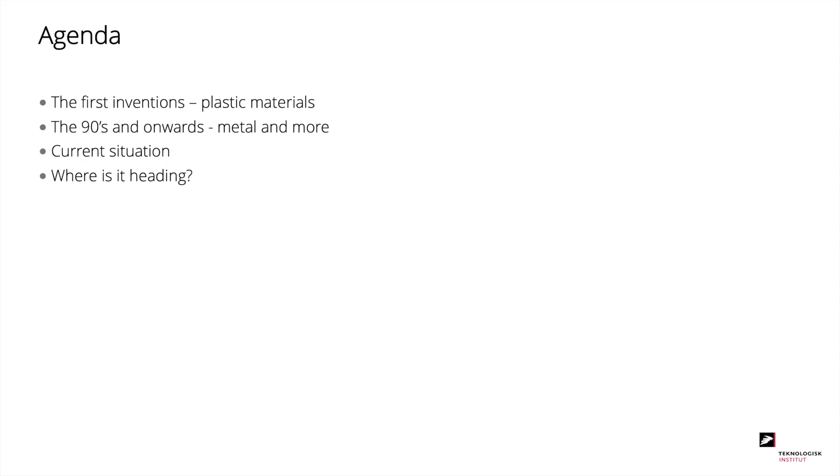Hi, my name is Henning. In this first video, I will go through the history of 3D print. The agenda is that we first look at the first inventions, the plastic printers. Then we look at the 90s and onwards, where metal printers were introduced along with other technologies. Then we look at the current situation, and finally where it's all heading.

We start by looking at the first inventions. It started back in 1980 in Japan, where Dr. Hideo Kodama filed a patent on photopolymer curing using UV light. However, that invention was never commercialized.

Then, a few years later in the US, Charles Hull filed a patent for stereolithography. In 1986 he started the company 3D Systems, which is still on the market, one of the big players. And in 1988, the first commercial rapid prototyping printer, SLA1, came on the market.

The next technology invented was powder bed fusion of plastic. In 1986, Carl Deckard from the University of Texas filed a patent on the SLS technology. This was commercialized in 1992, when DTM launched a beta machine. And in 1989, the European company EOS was founded, and it's still one of the big players on the market.

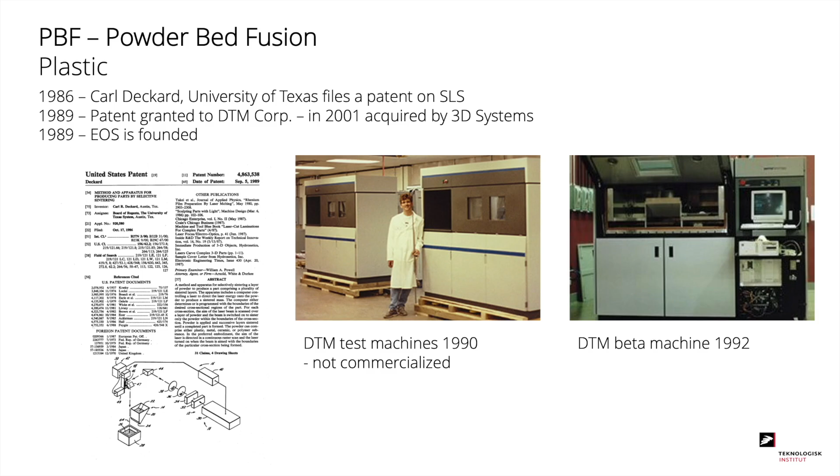The third well-known technology is FDM, fused deposition modeling, the extrusion technology, where we also today find all the cheap printers. In 1989, Scott Crump filed a patent for FDM, and Stratasys was founded, still one of the big players on the market today. The first commercial machine was shipped back in 1992.

When the patent expired in 2009, after living for 20 years, we saw an explosive growth of FDM machines, and prices dropped from around $10,000 per machine to under $1,000 per machine.

In the 90s, a lot of things happened. Only a few machines were installed, and there was limited commercial success on machine sales. However, there were a lot of R&D activities, and several new technologies were invented. The situation was that there were 3 times more patents filed than machines installed, which led to a huge number of patent fights where companies tried to defend their rights.

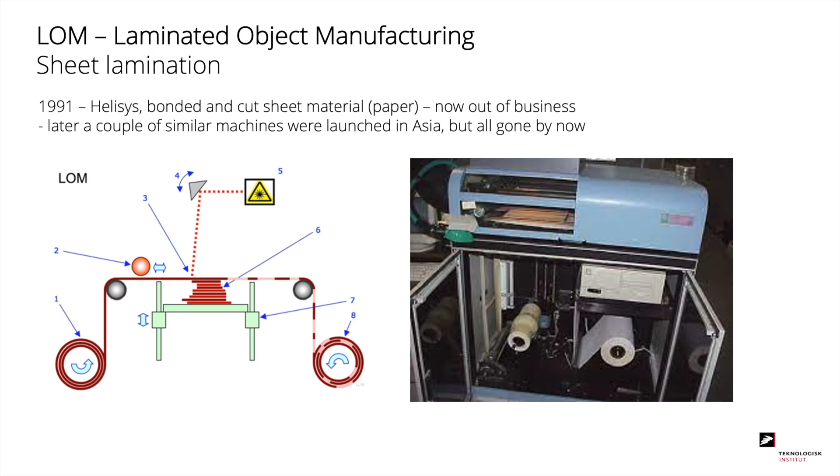Binder jetting is a successful technology also today, where you glue powder together of different materials, and for metal you subsequently have to sinter the parts. In 1996, Z Corp made a gypsum powder printer where the powder was glued together using MIT's inkjet technology. In 1999, Extrude Hone, now ExOne, made the first metal binder jetting machine. And finally in 2016, Hewlett Packard introduced the multi-jet fusion machine for plastic powder.

One of the metal technologies invented in the 90s was DED, directed energy deposition, where you place powder and at the same time melt it using an energy source. The first machine with this principle was launched in 1997 by the company Aeromet, which produced the world's first laser additive manufacturing machine for titanium powder.

In 2014, Sciaky made a machine that melted the powder using an electron beam. Also in the 2010s, several systems called wire arc additive manufacturing were built. In principle, they are just welding machines where the welding head is moved around by a robotic arm, and by doing that they print parts in 3D.

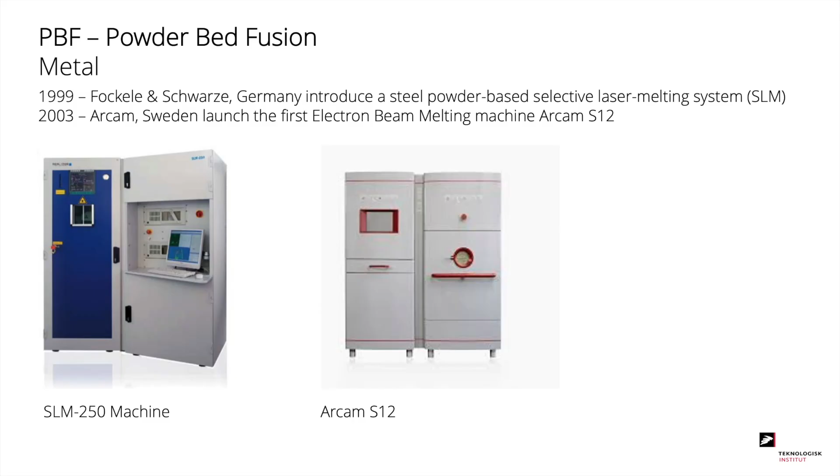Powder bed fusion is the most widespread metal print method today. The first system based on this principle was launched in 1999, where Fockele & Schwarze in Germany introduced a steel powder machine that used a laser to melt the powder. It's also called SLM, a name still on the market today. In 2003, Arcam in Sweden launched their first machine where the powder is melted by an electron beam. Material jetting is basically an inkjet printer where, instead of ink, you print with materials.

So you can print multicolor and you can mix different photopolymer materials. The first machine of this kind saw the light on the market in 2001 and was launched by Objet Geometries in Israel, now taken over by Stratasys.

And again, vat photopolymerization, the technology where it all started, a couple of new curing technologies have come up later. In 2002, EnvisionTEC came up with their first machine, the Perfactory resin printer. They use the DLP mirror chip known from projectors to cure the resin.

And in 2015, Carbon 3D came with their principle called the CLIP technology, where they cure the resin with an LED matrix, curing a full area or frame at the same time.

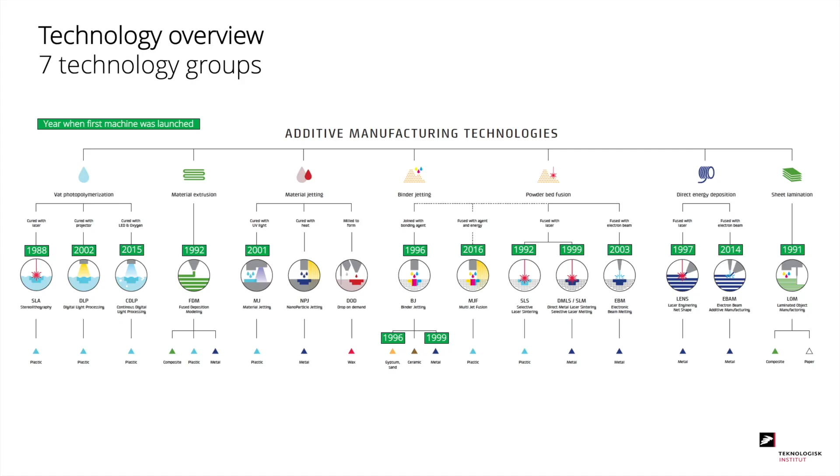Where are we today? Well, first of all, here you see an overview of all the technologies we have just been through. They are classified into 7 different groups, and in green is indicated the year when the first machine of each technology was launched.

Finally, we will see where it is all heading. Regarding machine sales, globally we see an exponential growth, both for industrial systems, defined as those with a price tag above $5,000, and for desktop and hobby printers with a price tag below $5,000.

Regarding materials, we see that on a continuous basis materials are being developed for almost each technology. We also see that material prices decline because of increased competition, as more vendors come up, also vendors independent of the technology suppliers. In 2020, still almost 80% of all materials were plastic materials, almost 20% were metal materials, and the remaining part, for instance ceramics, was around 2%.

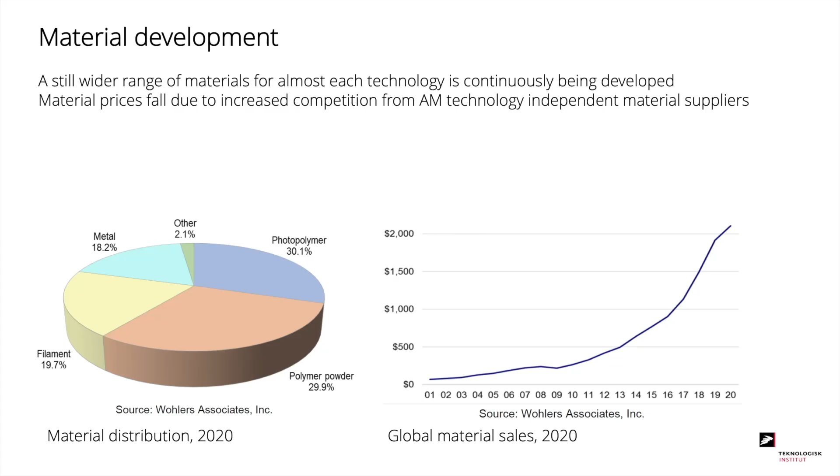For all materials, we also see an exponential growth, as for the machines. That's shown on the curve to the right.

Overall, we see for additive manufacturing a clear trend from prototyping towards real manufacturing and series production. That means we still produce prototypes, but more and more we produce tools, molds, fixtures, robot grippers, and end-use parts, with a tendency towards series production rather than individual parts.

Also, we see a clear consolidation trend in the additive manufacturing industry, where companies are merged or taken over, going towards fewer but bigger companies.

In 2020, globally, around 1 per mil of all production was additively manufactured. Some people find that this may grow to 5% in the future, so there's still a huge growth potential.

Hi, my name is Christopher, and in this module you will get an introduction to the 7 main AM technologies.

Let's have a look at the agenda for this module. First, we will look at an overview of the most common additive manufacturing technologies. We'll go through a 4-slide introduction for each basic technology, covering the technology itself, the materials, the pros and cons of the technology, and the leading machine manufacturers. Then finally, we will have a look at the technology maturity and industrial landscape.

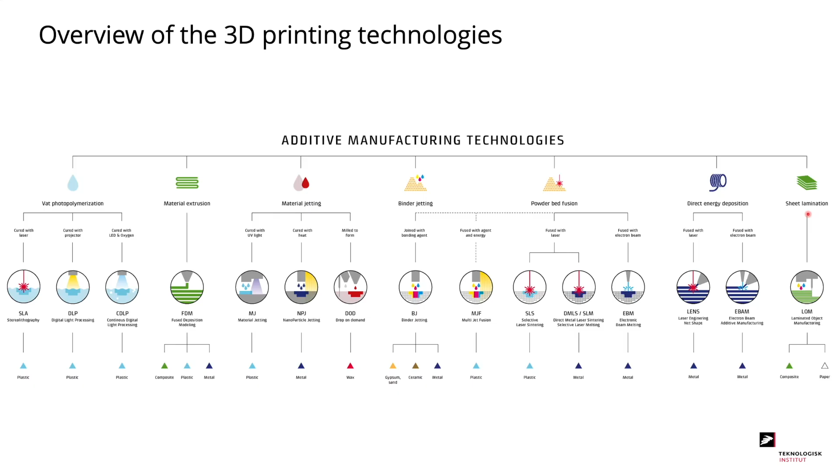First, we have the VAT technology. The VAT technology originated with the SLA process, also known as stereolithography. The process works by having a UV light curable resin in a bath. A laser source is applied to the resin and cures it locally. This is done layer by layer, as we can see here in the following video.

We first fill up our resin, and we then apply our laser layer by layer, slowly building up our part one section at a time.

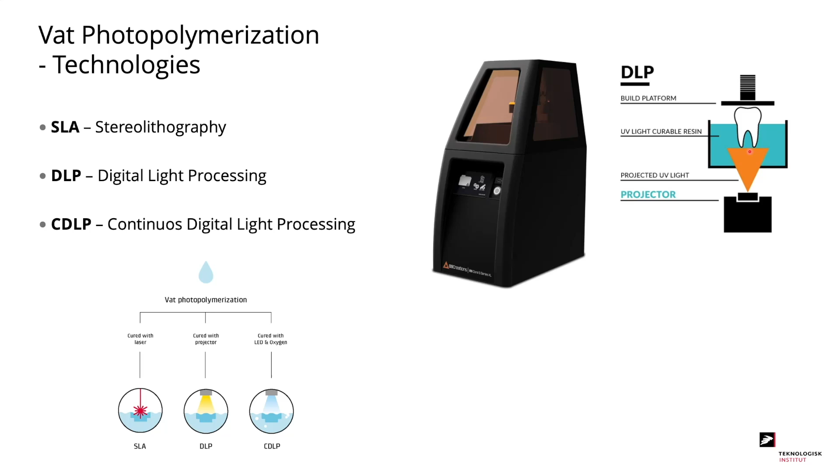The DLP process, or digital light processing, is very similar. However, we are using a projected UV light instead of a laser. This means we can process an entire layer at a time, and the process is typically faster. CDLP, or continuous digital light processing, is similar to DLP. However, the process platform is continuously moving, and we build our part as we go.

The VAT technology utilizes a range of materials. You can print everything from elastomers to transparent material, and also for dental applications.

Here we have an overview of the pros and cons of the VAT process. The pros include: it is good for prototyping, it is quick to print, and you can obtain a surface finish all the way down to 10 microns.

Some of the cons include the parts being brittle, and since they're reacting to UV light, they will react to sunlight, which leads to a loss of mechanical properties. There is also extensive post-processing required.

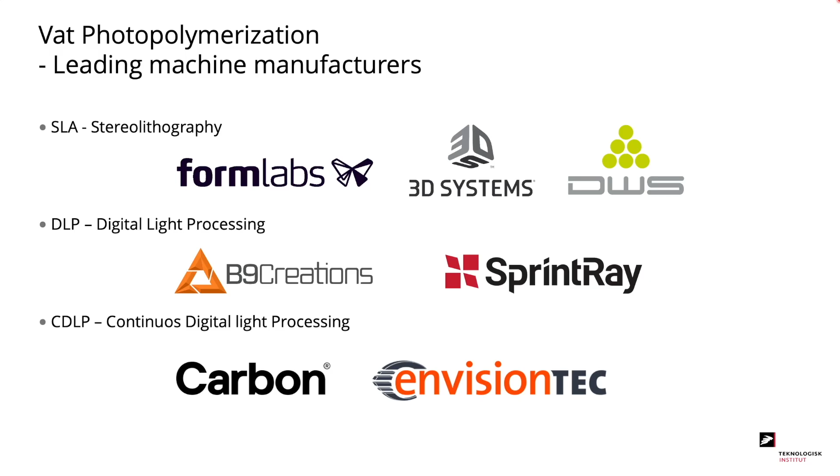Let's have a look at the leading machine manufacturers for the VAT process. For SLA, we have Formlabs, 3D Systems, and DWS. For DLP, we have B9 Creations and SprintRay, and for CDLP, we have Carbon and EnvisionTEC.

Now we will move on to the material extrusion process. This technology is most well known with the FDM method, or fused deposition modeling. The way it works is that you have a polymer material on a material spool. The material is extruded through a heated nozzle and deposited on top of your build platform. Layer by layer, you will be building your object. There are typically 4 configurations.

The first and most well known is the Cartesian 3D printer. As we can see here on the short video, we have a build platform that can elevate in the Z direction, and we have a nozzle that can move in the X and Y direction. We can then slowly build up our part like this.

Then we have the Polar 3D printer. Here the platform moves while the nozzle is steady. The third configuration is the Delta 3D printer. Here the nozzle is controlled using 3 linear actuators, and the material is deposited on a steady platform.

The final configuration is the Robot Arm 3D printer. Here you simply use a robot arm to control the deposition of the material as it is being extruded through the nozzle. Let's have a look at the materials used for material extrusion.

We have divided it into commodity materials and engineering materials. The main commodity materials include PLA, which is easy to post-process and has good heat resistance. Then we have ABS, known for great stiffness, durability, and a variety of colors. For the engineering materials, we have Onyx FRA.

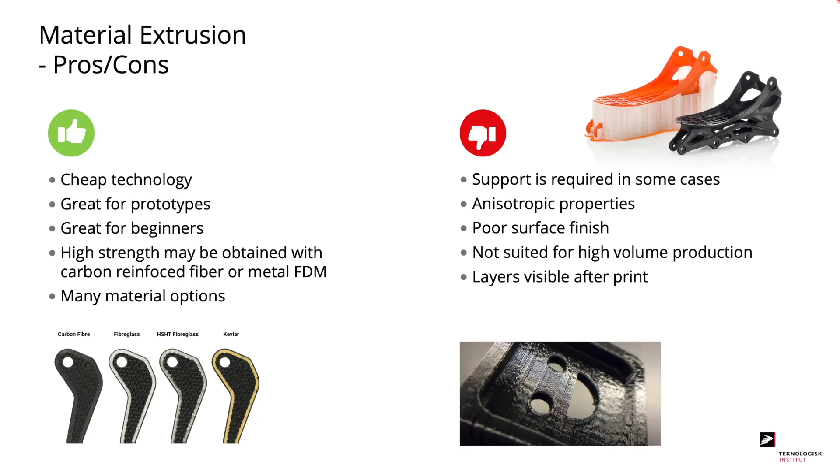Some of the cons include support being required in some cases. The properties are anisotropic, and you will obtain a poor surface finish. The leading machine manufacturers within material extrusion include Stratasys, Ultimaker, Markforged, and MakerBot.

Let's have a look at the material jetting technology. It can be divided into 3 sub-technologies. First being MJ, or material jetting itself. This is the main industrial technology.

Then we have NPJ, or nanoparticle jetting. This uses particle-infused liquid and heat to evaporate the liquid. Then we have DOD, which is drop on demand. It uses 2 print jets, one for building material and one for support material.

The technology works similarly for all 3 cases, and we here have a video demonstrating how the material jetting technology works by depositing material and using a UV light to cure the material as we go.

Let's have a look at the available materials. Here we have a view of the PolyJet materials, which is Stratasys' version of the material jetting technology. We can see a wide range of polymer materials, all the way from 2003, where they developed a rigid material called RGD 720.

Through the years, they have developed different kinds of materials. In 2011, they developed a clear material called VeroClear. We can see that after 2016, they developed a full color realism material.

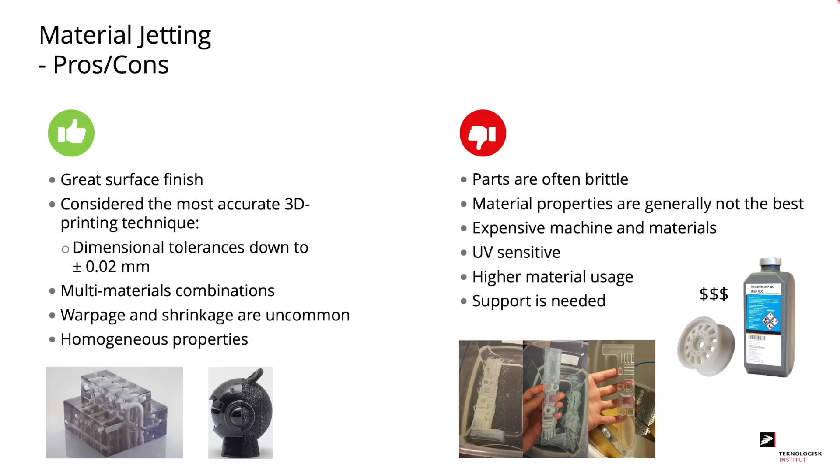Some of the cons include that the parts are often brittle, and the material properties are generally not the best. Both the machine and materials are quite expensive. The leading machine manufacturers for material jetting include Stratasys and 3D Systems for material jetting, XJet for nanoparticle jetting, and SolidScape for drop-on-demand. Now we will move on and have a look at binder jetting.

If we look at the binder jetting technology, we can see that it is subdivided into 2 technologies: one being BJ, or binder jetting, and the other being MJF, or multi-jet fusion. If we look at the process for the binder jetting technology, we can see how we are applying a binder to our powder.

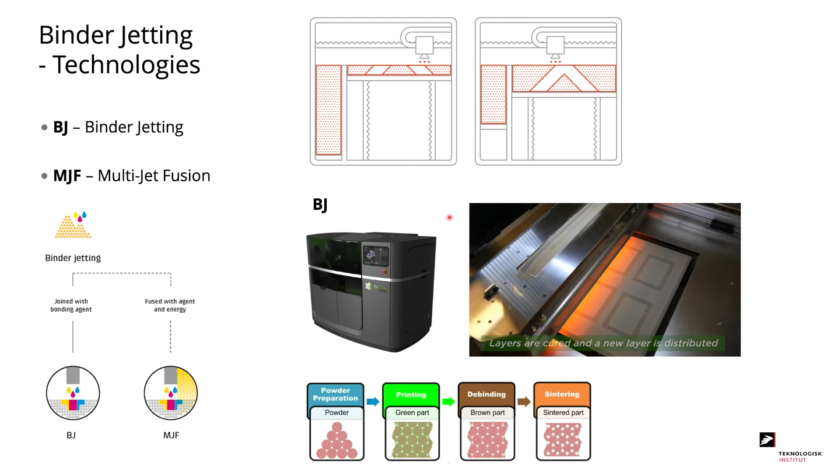After applying the binder, we heat it up to cure it together with the powder particles. After being cured, we have what we call a green part. The green part then needs to go through a debinding process where we obtain our brown part. It is very brittle in both of these conditions. Finally, we move our brown part into a sintering process where we sinter together our powder particles, obtaining our final geometry.

The multi-jet fusion process is very similar to the binder jetting process. However, we are using polymer instead of metals. Here we are in one continuous motion, both applying the fusion agent and heat to fuse together the part.

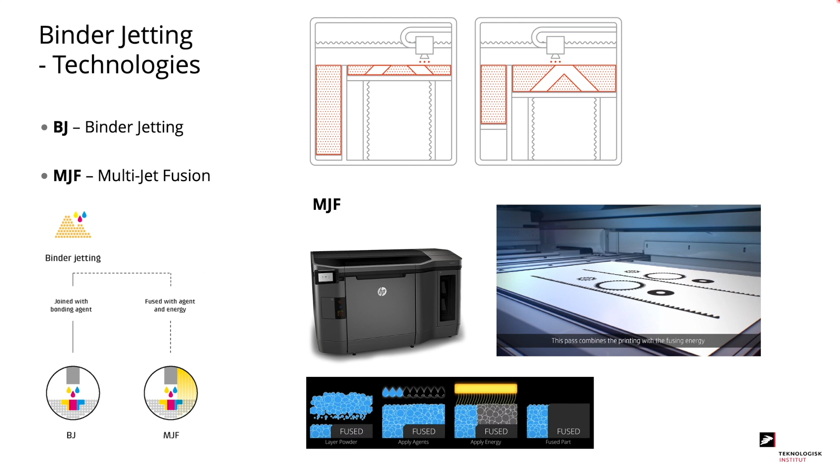If we look at the available materials for the binder jetting technology, we can see that for binder jetting itself, we have a wide range of alloy metals. We can also use ceramics, and we can even use ceramic metal composites. For multi-jet fusion, it is a wide range of polymers that are available.

Let's look at the pros and cons of the binder jetting process. We have fast production of parts, we can obtain high layer resolution, and the as-built surface finish is all the way down to 6 micron.

Some of the cons include, specifically for binder jetting, that the parts are fragile in both green and brown state. The debinding process is highly labor intensive, and the parts will shrink in a non-uniform manner, all the way up to 27%.

The leading machine manufacturers within binder jetting are ExOne and Digital Metal for metal binder jetting. For ceramic binder jetting, it is 3D Systems and VoxelJet, and for multi-jet fusion, we have HP.

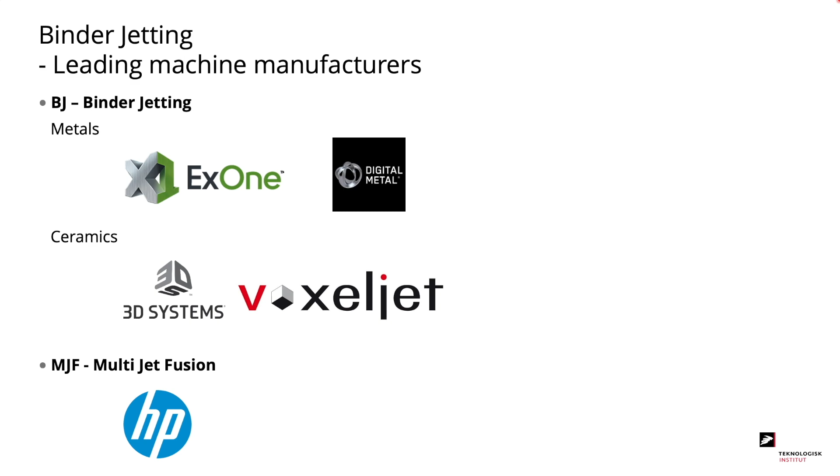Now we will move on to powder bed fusion. The powder bed fusion technology can be subdivided into 3 main categories: SLS, known as selective laser sintering; SLM, known as selective laser melting; and EBM, known as electron beam melting. The principle behind all 3 subcategories is the same. We are either applying a laser or electron beam to a powder bed of powder.

Let's look at the available materials for the powder bed fusion process. For SLS, we are working with polymers, and we can use everything from PA12 to PA with fillings such as carbon, glass, or metals. For SLM, we work with metals.

Here we can use everything from stainless steel to Inconel, aluminum alloys, and even precious metals. The EBM process is very similar, and we can also use stainless steels, titanium alloys, and even alloys such as cobalt chrome. The pros and cons for the powder bed fusion process includes that you can create complex geometries.

It is ideal for functional parts. For the SLS technology, you will not require any support. And the SLM and EBM technology both provide great mechanical properties.

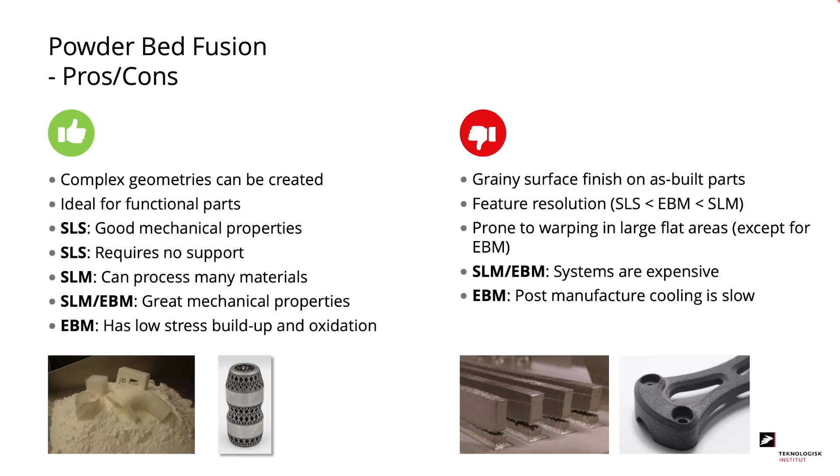Some of the cons include that you will have a grainy surface finish on as-built parts. The feature resolution is not the best, however SLM is better than EBM, which is better than SLS. It is also prone to warping in large flat areas, except for EBM, because it is processed at a very high temperature. For both SLM and EBM systems, there is a big con that they are very expensive.

The leading machine manufacturers within powder bed fusion are, for SLS, EOS and 3D Systems. For SLM, we have EOS, Concept Laser, Renishaw, Trumpf, DMG Mori, Prima Additive, and SLM Solutions. For EBM, we have Arcam EBM and JEOL.

We will now move on to directed energy deposition. Directed energy deposition can be subdivided into three main categories: first being LENS, known as Laser Engineering Net Shape; then EBAM, known as Electron Beam Additive Manufacturing; and then we also have WAAM, Wire Arc Additive Manufacturing.

The basis of the technology is that you're using either a laser beam or electron beam to melt powder or wire as it is being deposited on a substrate. The wire arc additive manufacturing process is very similar, however here you are applying a current to your deposition nozzle and substrate, which creates an electric arc between the two, which can melt the material as it is being extruded.

If we look at the process of the technologies themselves, we can here see how the LENS process works.

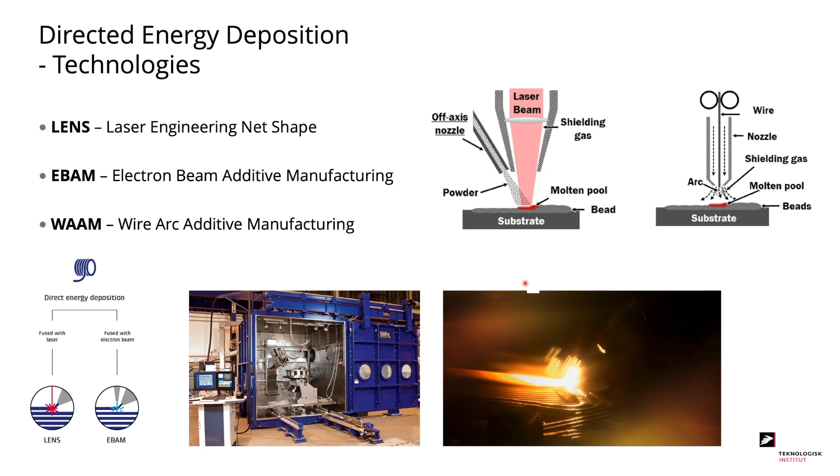We are applying our powder together with a laser, allowing us to build up our part. The EBAM process works similarly, however here we are using a wire to deposit, and we have an electron gun out of view in this video. Finally, we have the WAAM process, which uses wire arc melting to deposit a wire as it is being extruded, and we can see how we can quickly build up a bathtub-like structure.

The available materials for directed energy deposition include stainless steels, titanium alloys, Inconel, aluminum alloys, and even copper.

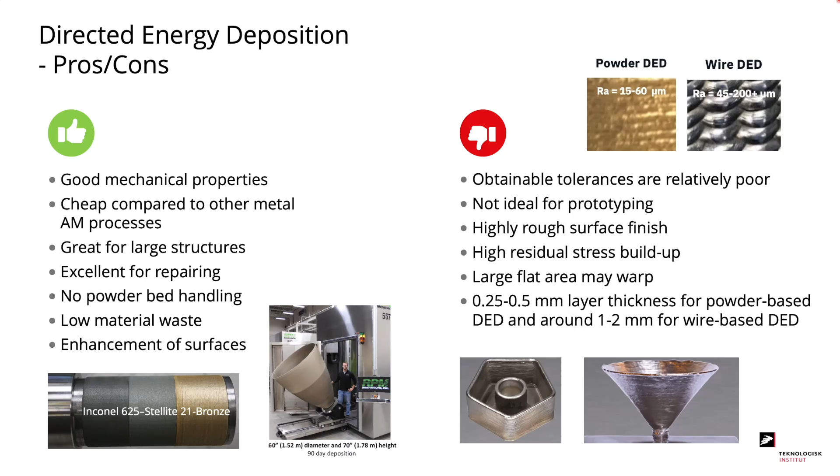If we look at the pros and cons of the directed energy deposition process, you will obtain good mechanical properties. It is cheap compared to other metal AM processes, and it is great for large structures as well as excellent for repairing. Some of the cons include the obtainable tolerances being relatively poor, it is not ideal for prototyping, and you will have a highly rough surface finish.

The leading machine manufacturers within directed energy deposition include, for the LENS technology, Optomec, Beam, and Prima Additive. For the EBAM technology it includes Sciaky, and for WAAM it is RAMLAB and MX3D.

Now we will look at the final of the 7 main technologies, namely sheet lamination. The specific technology is known as laminated object manufacturing, or LOM. It works by having a foil supply of either thin metal or paper. A heated roller is rolled across the foil, ensuring that it is bonded towards the lower part of the object you are building. Afterwards, a laser cuts up your piece to ensure that only the area of interest is left.

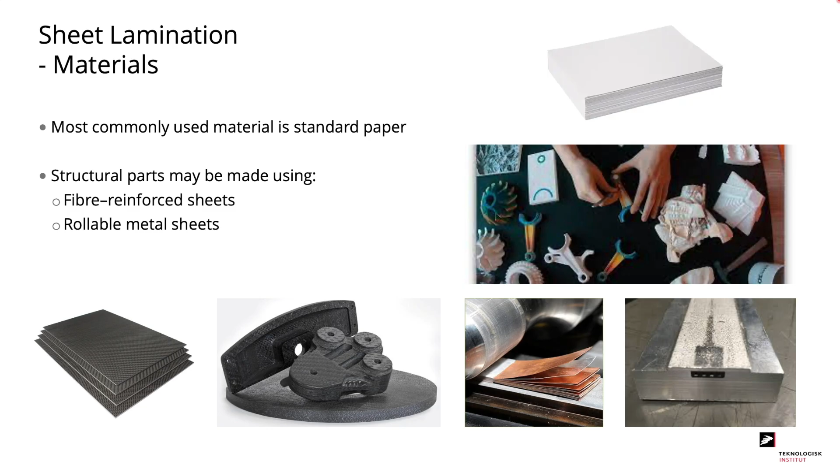The process is also possible to use for paper with color, and after having built up your paper part, there is some manual processing removing the layers that are not needed. The most commonly used material for sheet lamination is standard paper, but we can also produce structural parts by using fiber-reinforced sheets or rollable metal sheets.

Let's look at the pros and cons of the sheet lamination technology. The materials are cheap and the production costs are low, you can create large parts, and you don't need any support. However, some of the cons include that you cannot produce complex geometries, the printers are relatively expensive, and you will only obtain a poor surface quality.

The leading machine manufacturers for the sheet lamination technology are originally Helisys and Mcor. Helisys has since been succeeded by Cubic Technologies, and Mcor has been acquired by Clean Green 3D.

Now we will have a look at the technology maturity and industrial landscape of metal AM and polymer AM. Let's first look at the maturity of the AM polymer technologies. All of the technologies that we covered, including VAT, filament-based material extrusion, powder bed fusion, and material jetting, are all in the top right corner, meaning they are used for widespread industrial use.

If we look at the metal AM maturity index, we can see that the SLM technology has industrial widespread use. The LENS technology, EBM technology, and WAAM technology have industrial use. And finally, both EBAM and binder jetting are in the category of first applications.

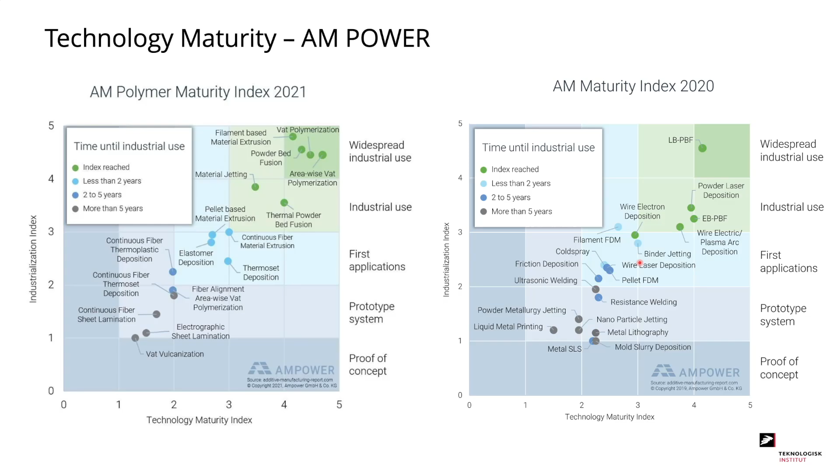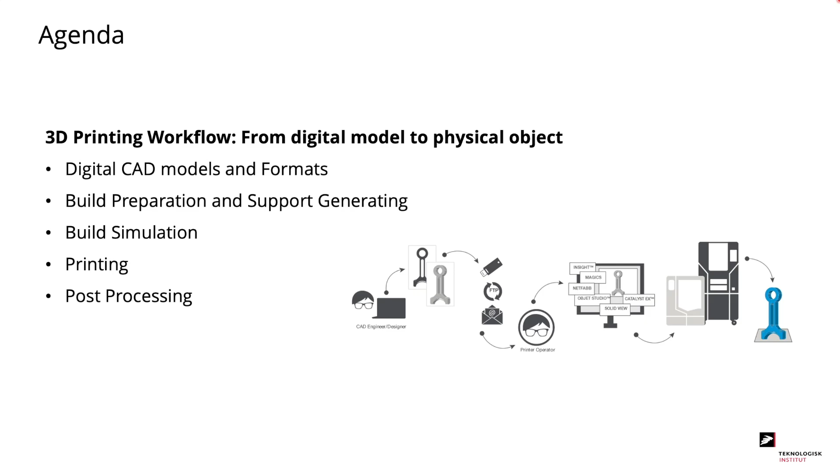First of all, we need a 3D model of the part that we would like to print. We will make that in some kind of CAD program. For industrial use, you will typically use programs such as SolidWorks or CATIA. These programs use parametric modeling, where it is easy to go back and make changes, but also easy to make new changes. Some of the common formats for these programs are either STEP or Parasolid X_T.

For non-industrial use, the STL format is common.

This is a dead format where it is more difficult to go back and make changes. The STL format uses triangles to represent the model, which makes it difficult to make rounded curves. In the future, the 3MF format could replace the STL format and solve some of these issues.

First, the CAD model is imported into the job preparation software. This could, for instance, be Materialise Magics. Next, we need to orient our part in the printer. This is typically a compromise between getting a high level of detail, but also printing as many parts as possible in each build. Finally, the support structure should be applied to the part, which ensures that the part is attached to the platform during printing.

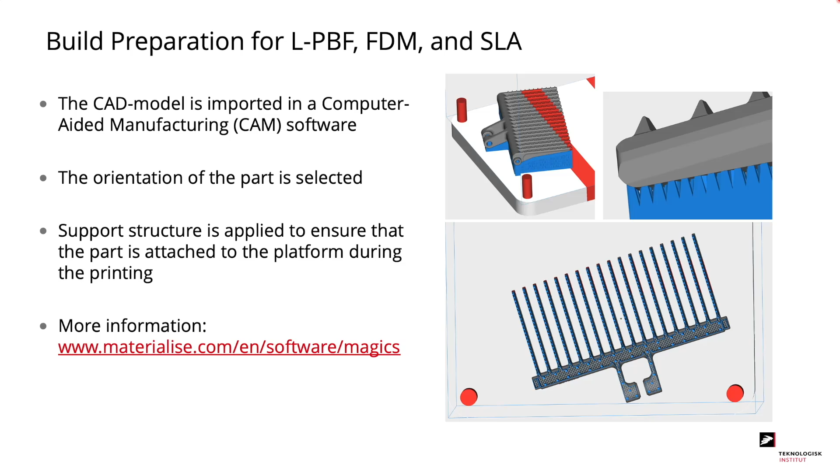Keep in mind that the support structure should also be easy to remove after printing. You can find more information about build preparation at the Materialise Magics website.

Next, we will look at build preparation for material jetting and SLS, which is slightly different. Here, parts can be nested in 3 dimensions within the build chamber, and support structure is not needed. When you don't need support structure, you have greater design freedom compared to other print technologies. Just be aware that you should be able to remove powder from channels and cavities after printing.

Before printing, you can simulate the whole printing process. You do this to predict and avoid failure during printing, and to estimate geometrical distortion, and you can even use it to compensate for the distortion. Build simulation is often used for laser powder bed fusion and metal binder jetting, but also in some cases for FDM and SLS. After printing, we need post-treatment.

Here are some examples of initial post-treatment. For FDM and SLA, you use a screwdriver and grippers to remove the support structure. For SLM and E-beam, the two metal technologies, you first need a furnace to remove residual stresses. Then you need an angle grinder or grippers to remove the support structure, which is more difficult to remove compared to FDM and SLA.

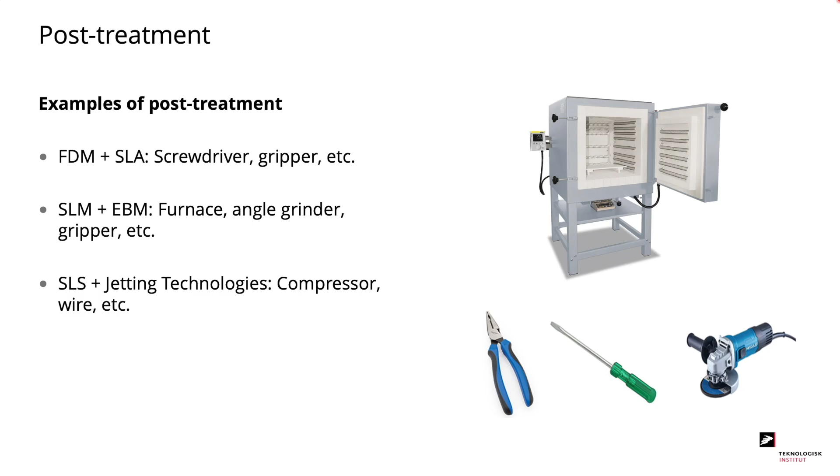For SLS and the jetting technologies, we don't have support, but the powder is more difficult to remove. Here we use a compressor to blow away loose powder, and we can also use piano wire to remove powder from internal channels.

Finally, we have surface finishing. For metal printing, we use more aggressive technologies. This could be abrasive blasting, where you typically use glass or corundum beads to even out the surface. It could also be deburring, where you use ceramic chips to grind the surface. For polymers, you can also use deburring. Furthermore, you can use chemical etching to seal and smoothen the surface. Finally, you can also color your parts. This is especially relevant for SLS parts.

Finally, we have a video showing the entire workflow. In this case, it's laser powder bed fusion in metals. First, we are preparing the build job by finding the perfect orientation and adding support structure on the part. Next, we are printing the part layer by layer.

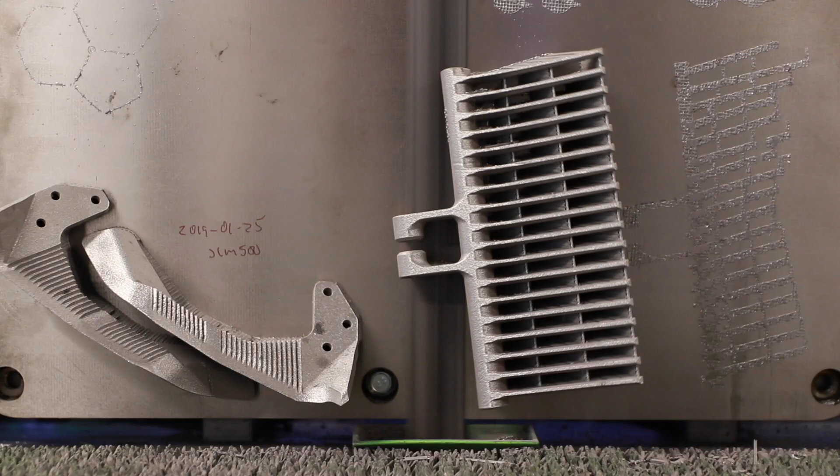After printing, we transfer the build cylinder to a powder removal station. Here we remove all the powder that is not used to print the part. After removing the powder, the parts need stress relief, which is typically done in a furnace. After stress relief, the parts are removed from the platform with a bandsaw, and the support structure is removed by hand. Finally, we have surface finishing, where we use abrasive blasting and deburring.

Hi, my name is Ronnie, and in this module we'll look at some design features that can add value to your 3D printed part. Let's start by looking at the agenda for this module.

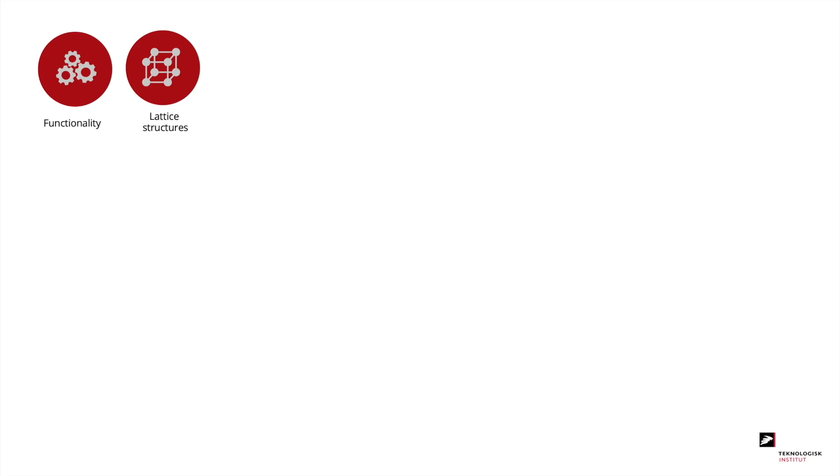If we start in the top left corner, we can see that we can use 3D printing to get some new functionality into our parts. We can also start to make some lattice structures that weren't possible before. We can start to optimize our components towards lightweight, thereby making them both lighter and stiffer. We can begin to make part consolidation, where we put more parts together in one.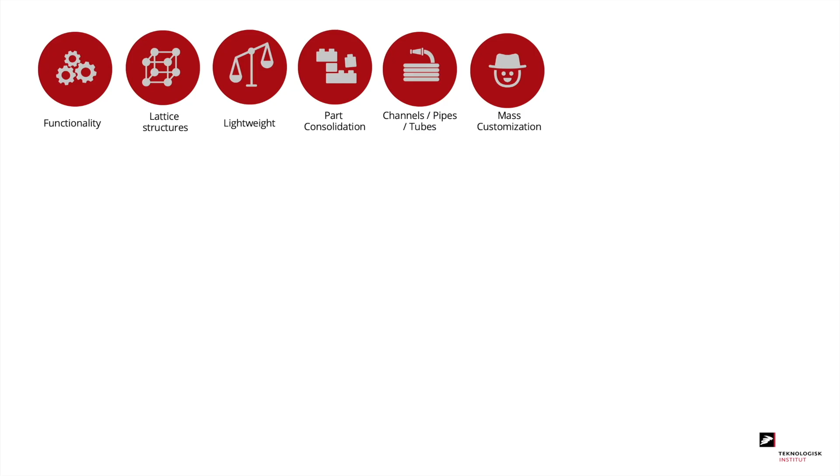We can make channels and tube connections that weren't possible before. We can also make mass customized products in large numbers without added expenses. And in addition, we have the possibility of making some components with thermal properties that weren't possible before.

The 3D printing technology also gives us a large extent of design freedom that we can utilize. And finally, the computer is one of the really strong tools when designing for 3D printing. So we'll also look at how we can use that.

If we start to the left and assume that we need to design a product, well, then we can take the balls from the top row and add them to the basket. Thereby we add some value to this product, which justifies the use of 3D printing. The more balls that we can start to put in this basket, the more value we can add to the product, and the more we can justify using 3D printing as a manufacturing technology.

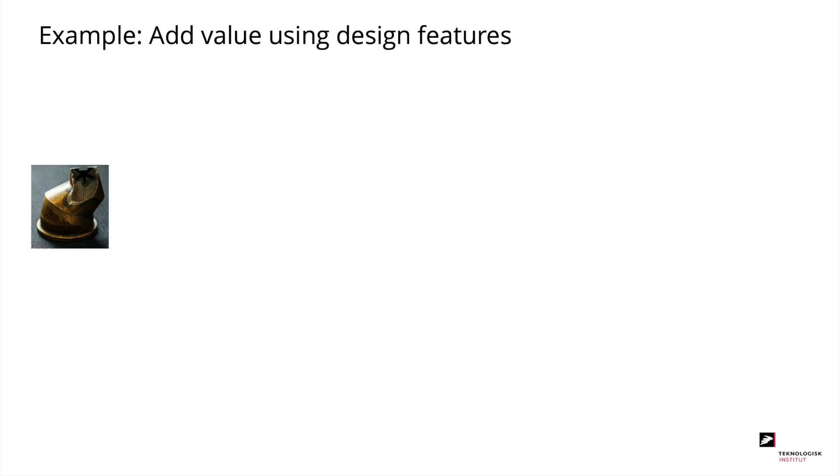Let's take an example to show how these baskets can be used to design a part. And remember, the more features that we can get into the basket, the better the product we get. So if we take a relatively simple part like this nozzle to make cookies, then it used to be made out of 6 parts, but with 3D printing we can make it in just 1 part. So here we have some part consolidation.

Furthermore, the flow through the nozzle is more smooth and even, and we can get that by utilizing some of the possibilities of making special channels. And finally, we can use mass customization, where depending on the cookie that you want, we can quickly change the design of the nozzle so we get a nozzle that fits the individual cookie that you want to make.

Now we've taken a brief look at why we should design for 3D printing and how we can utilize these features. Now we'll take a closer look at the 9 different features and see where they make sense by looking at some different cases where they've been used.

This is interesting because it saves a lot of assembly time, and we don't need to have as many spare parts in stock. Often we can also save some weight, and it reduces the amount of contact areas, which could be of interest to some industries.

Here's the first case to illustrate part consolidation, and this is the layout that I'll use for all the cases. So in the top right corner we can see the basket, and we can see the features that we added to the basket in this case.

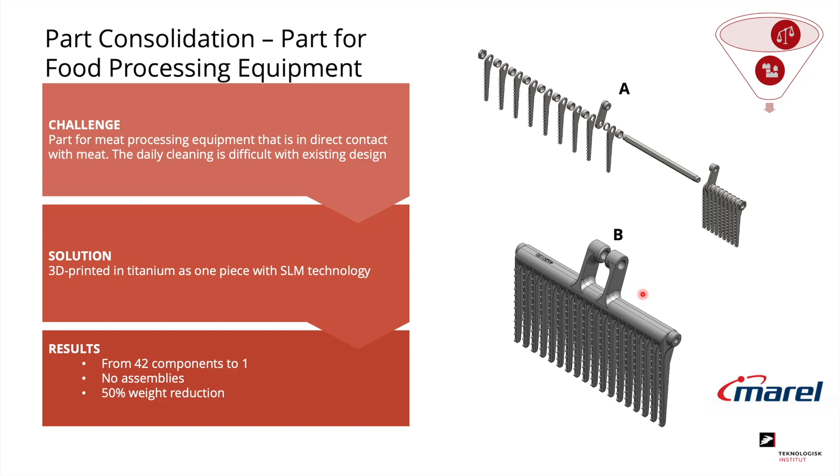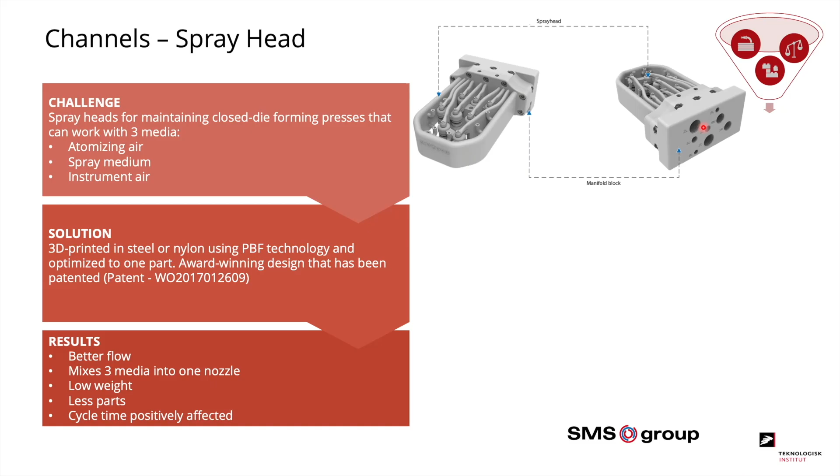If we look at how it was made previously, we can see in the picture to the left that it was a massive block consisting of a lot of different parts. That means that when we start to look at 3D printing, there's definitely a potential for reducing the weight. If we then compare it to the 3D printed version to the right, we can see that this is much smaller, so there's definitely a weight reduction.

We've also optimized the flow, and it's easier to get the lubricant where you want it because we can control the placement of the nozzles much better. By 3D printing this spray head, it's now possible to print it in metal, but we can also print it in nylon with the powder bed fusion technology, and it can withstand high temperatures. In fact, this is such a good idea that SMS Group has chosen to patent this solution because they see a great business opportunity.

Conformal cooling is all about getting these channels as close to the surface of the metal block as possible, because then we can cool our plastic part much faster when we cast it. In a minute you'll see a picture of what such an injection mold looks like.

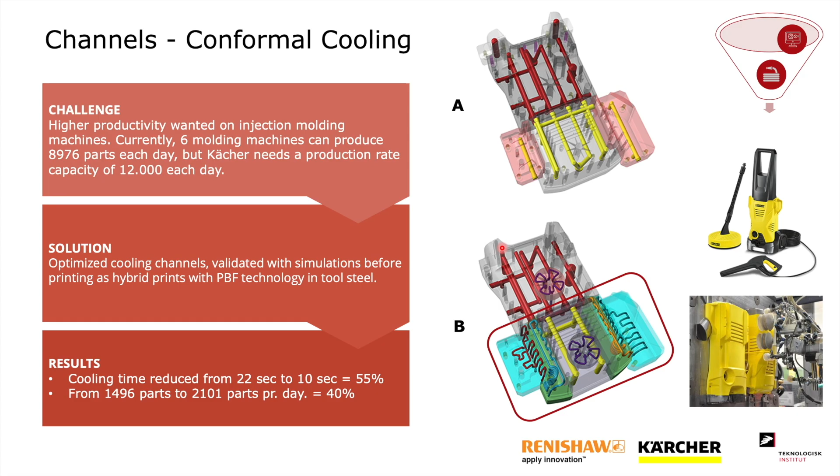Next up, we'll look at mass customization, where we can 3D print parts that perfectly fit the individual person. So what is mass customization? This is when we design products that perfectly fit their function, and as the function changes, we can also quickly change the products. This means we often get better solutions that are a much better fit.

This is really interesting when we look at parts that need to fit the human body. So if, for instance, you needed a custom-fit bike helmet, you would be able to 3D print it.

One of the industries that have really seen an impact from using 3D printing is the hearing aid industry. Towards the end of the 1990s, you went from modeling these hearing aids and making them by hand, to now 3D printing them. The way you make these hearing aids is that you take a wax cast of the person's ear.

Then you scan it and put it into the computer, and via a preparation program it goes to the 3D printer where it's printed, often on an SLA printer. Then you get the finalized print, you add the electronics, and the product is ready for the client. This means you've saved a lot of manual hours in the manufacturing process by 3D printing these hearing aids.

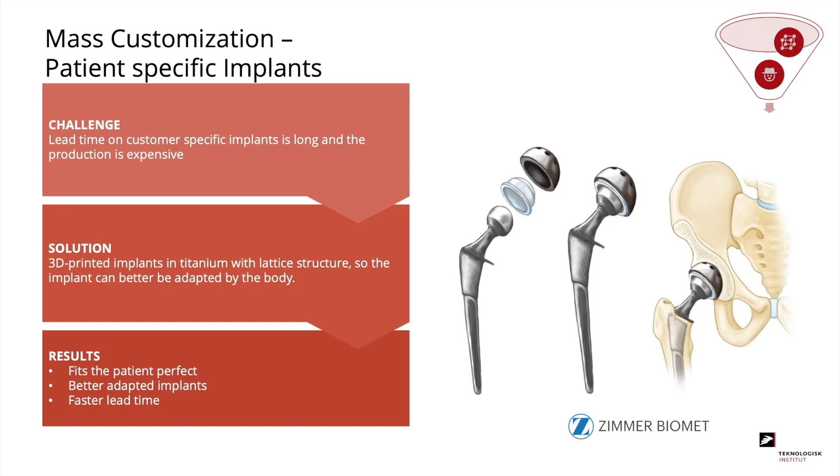So the hearing aid goes outside the body, but using metal 3D printing we can actually start to print parts that go inside the body as well. In this example, it's a hip socket that's being 3D printed. The hip socket consists of two 3D printed parts.

In this picture to the left we see the socket itself, and the surface is perforated and has a kind of lattice structure. It's because of this lattice structure that the tissue inside the body ties better to this type of prosthesis than if it was a blank surface. And it's because of this that there's a huge potential in 3D printing parts for humans using metal 3D printing.

With 3D printing, it's also possible to achieve new thermal properties with materials you weren't able to use before. So what is thermal when we're talking 3D printing? Well, it's a component's ability to absorb or give off heat.

One of the places where we can utilize 3D printing to produce thermal components is, for instance, a CPU cooler for computers. What you want from a CPU cooler is essentially that it's as efficient as possible, as small as possible, and weighs as little as possible.

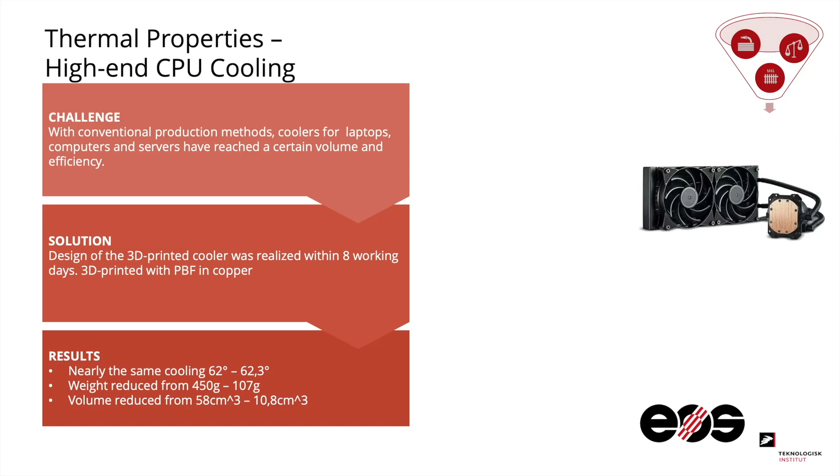And if we look at what came out of the printer, it looks something like this. This one is printed in copper, which has very good heat transferring properties.

If we look at the results from this project, in 8 days they managed to get on the same level as a high-end CPU cooler. Where they really managed to make an impact was in terms of weight. We went from 450 grams to only 107 grams, and the volume has been reduced to a fifth.

You may think, how interesting is this? It's actually pretty interesting, because all this either goes inside our very small laptop, or it goes inside a huge server station where space is very costly. So the smaller, the better.

The next case is an industry case that focused on whether we could produce headlights for cars with cooling for the LED bulbs. On top, we have the conventional part, and below we have the 3D printed version. What's really interesting about this case is not only that we can optimize the cooling, but also that we can stack the parts in the build platform. This means we can fit 384 parts in one build, showing that we're able to produce just as many with 3D printing as we could conventionally.

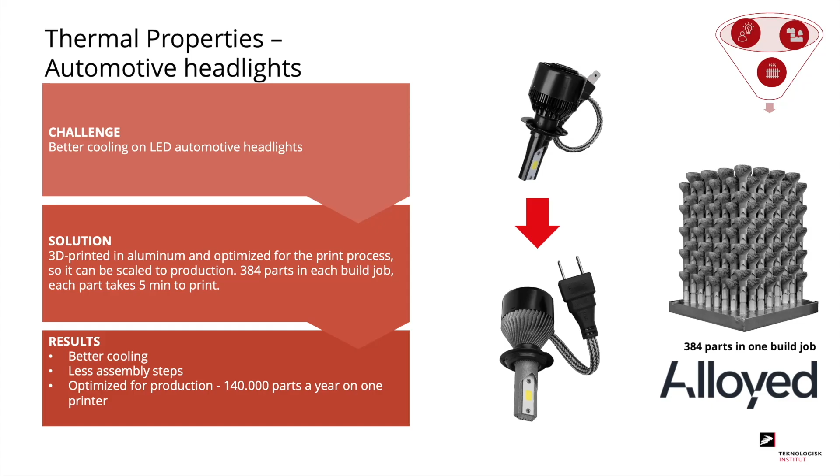Now it's time to look at how we get more functionality into our 3D printed parts. What is functionality when we talk 3D printing? That is when we're able to get more functions into our parts than we were able to conventionally. For instance, it could be something that affected performance, or something that affected how easy it is to service the process in which the component is part. Does it help optimize the process? We'll look at some different cases where we utilize the extra functionality that 3D printing gives us.

The next case that utilizes the functionality of 3D printing is a spatula for folding dough. You may know the scenario from home where you're working with a spatula, and when you flip dough over, the dough sticks to the spatula. Here, they've solved this issue by making holes in the spatula and blowing air through the end so the dough releases much quicker. Since this spatula is for industrial use, it needs to happen very quickly, so there are a lot of holes and it's pressured air coming through.

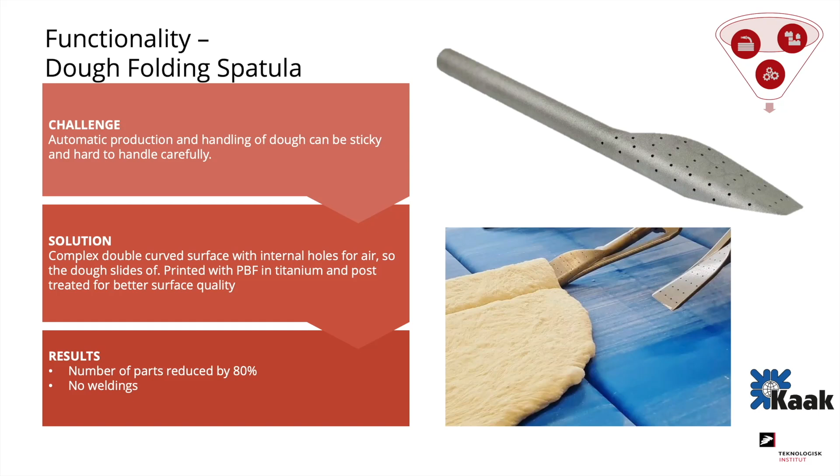The next case is one of the more advanced ones, and it's really gained some extra functionality from using 3D printing. These are pickups for record players produced by the company Ortofon, which is world leading in this area. The special thing about these pickups is that they are 3D printed in metal using powder bed fusion technology. Since we're using this technology, we can make cavities with loose powder in it. The interesting thing is that the loose powder has a dampening effect on the pickup, giving a much more pure sound through your speakers. In fact, the sound is so pure that these pickups have been named the best in the world.

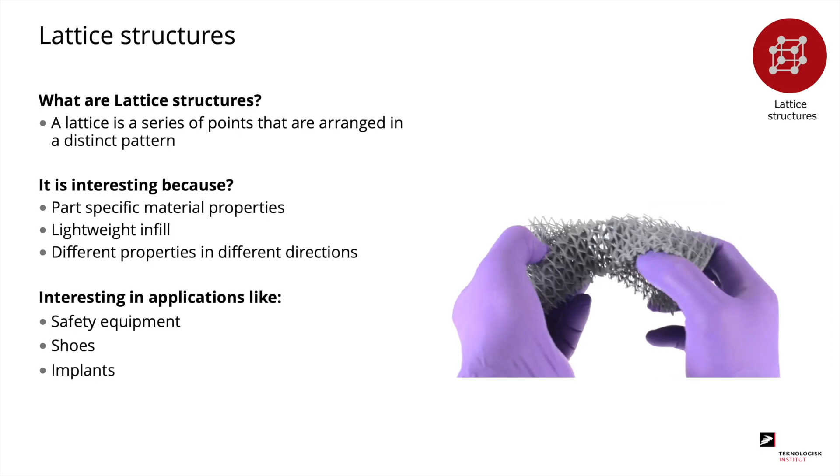Next up, we'll look at lattice structures. A lattice structure is a series of points arranged in a distinct pattern, and for the sizes we're looking at here, it's only 3D printing technology that can be used to make these solutions. As you can see in this figure, lattice structures can be elastic and bend in all different directions. This is really interesting because we can use them for lightweight solutions or for functionality that wasn't possible before. We'll illustrate that with a few cases.

This case is one of the stranger ones, where Adidas has decided to make a running shoe that's harder to run in. They designed a lattice structure that actually absorbs energy, making it harder to run, so it'll feel like you're running in sand dunes when in fact you're only running on asphalt. Adidas has invested heavily in 3D printing, as you can see on their website, where there are quite a few shoes with 3D printed soles, all available on the market today.

This is really interesting when we talk about metal printing, because here you can also print lattice structures that mainly have the function of stiffening the part.

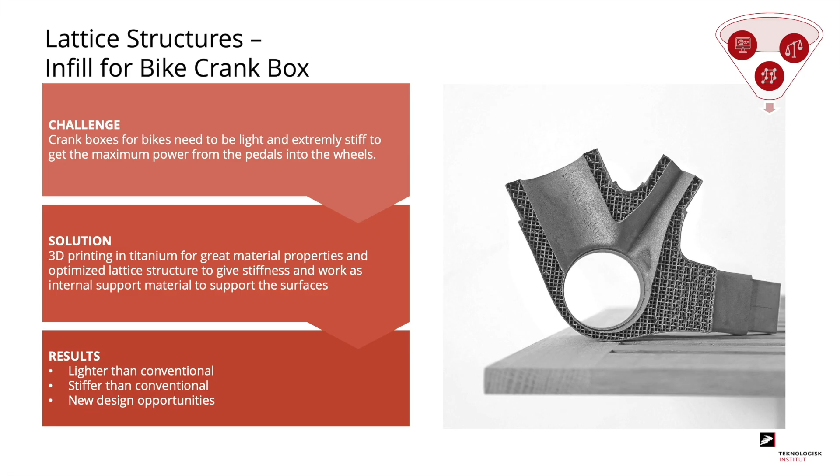You cannot talk about 3D printing without also talking about lightweight. So why is lightweight interesting? From a financial perspective, all the material we add when printing adds a cost, so the more we can reduce the mass of our part, the cheaper it will get, and I guess that's something we're all interested in. This often also leads to a lighter part than if we were to design and manufacture it conventionally.

The first case we'll look at is a knife mounted on a robot in the food industry. The original knife consisted of 20 parts and weighed around 800 grams. That may not be a lot, but by optimizing it, we managed to get it down to 80 grams and just one part. By 3D printing the knife, we also get a shorter delivery time, and the production price is reduced by 60%.

Furthermore, by reducing the mass of this knife, we can increase the speed of the robot. This actually means we can go from having 8 robots to only 6 robots running the same amount of dough.

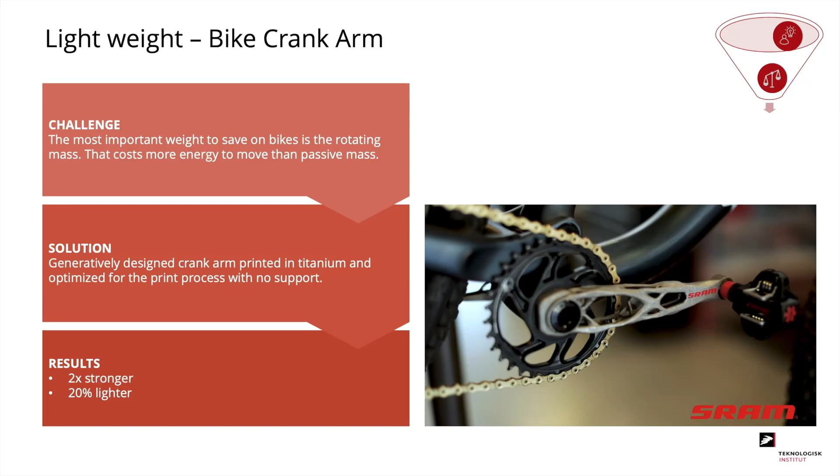One industry where weight means a lot is the bicycle industry, as mentioned previously, because the lighter you can make your bike, the less energy you need to move it, say up a mountain. One example is from SRAM, who looked at optimizing their bike crank arm. It's designed so it doesn't need support material when printed, and it's printed in titanium. By printing in titanium and topology optimizing it, it's now twice as strong as a conventional bike crank arm, and it's 20% lighter. It's really interesting that you can save this much weight in such a small component.

One area where the design freedom of 3D printing is interesting is the food industry. Here it's the company Marel that makes machines for food processing. The example I brought is a robot gripper, and when you first look at it, it doesn't look as if it utilizes this design freedom.

But then if you look closer, you can see that there are roundings practically everywhere, and that makes the part easier to clean. We can also see that the part is 50 centimeters long, so if we were to make it conventionally, then we would maybe need to mill it out.

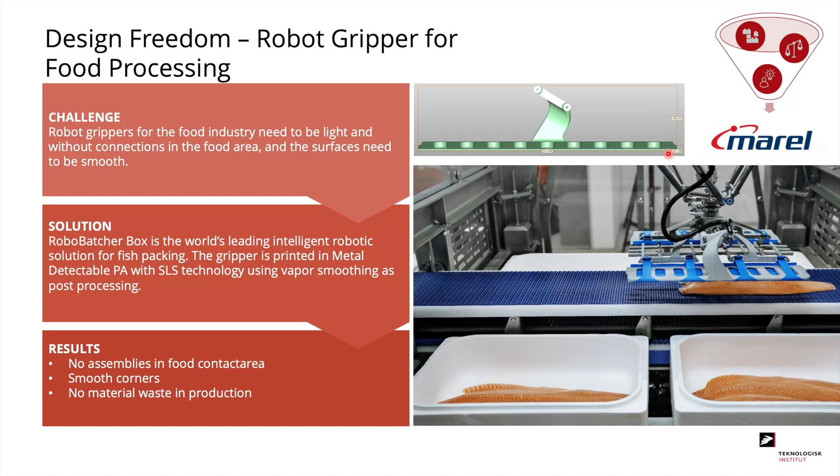This would require a big block of plastic, so we would need to mill away a lot of material. You could also have it consisting of several different parts, but then you would have assemblies in a food contact area, and that's not ideal either. So 3D printing really is the best solution.

Michelin saw the idea in using 3D printing for their injection molds for casting tires, since they could get some additional functions and better grip out of their tires by using these molds. In fact, they've been doing it since 2013, so they've been at it for a while.

They also made a small 4-minute video where they explain why and how they use 3D printing, and you'll find a link for that at the end of this presentation.

The last feature that we'll look at here is computer-aided design, because without a computer there wouldn't be anything called 3D printing. The most common way to construct and design a part is by designing it in a 3D CAD program. It could, for instance, be one of the programs that I've listed here.

But since 3D printing allows you to print some very advanced geometries, we're starting to see more and more new programs where you can actually have the computer generate the design. We'll take a closer look at that in the next couple of slides.

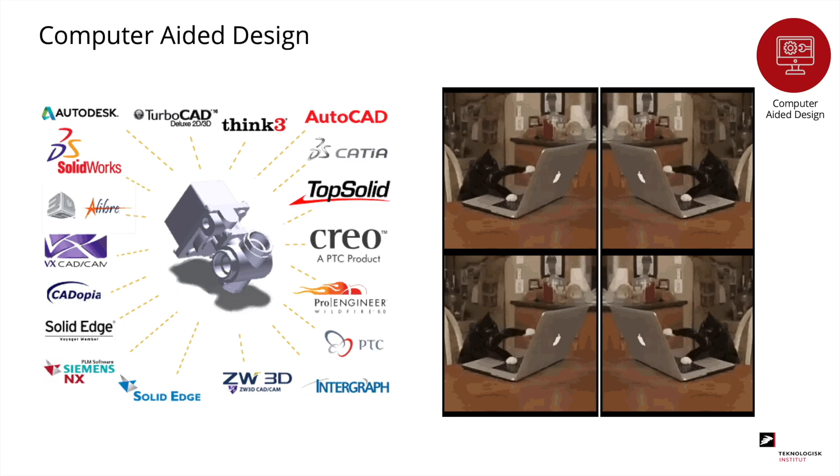With topology optimization, we looked at how much material we could remove from a part, but with generative design, we look at how we can connect different dots with the least amount of material. In this video, you can see an example of how it works.

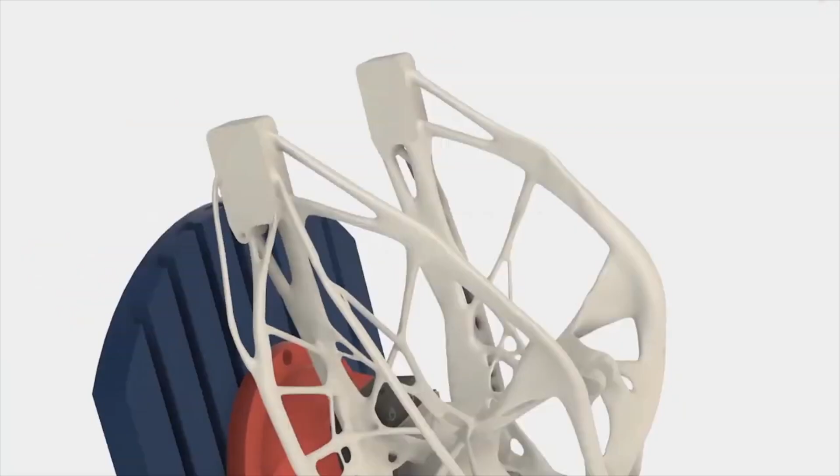When you're done, you just press order, and then they'll print it in SLS for you, and you get a robot gripper that perfectly fits the part that you need to handle.

One of the biggest challenges when we're talking 3D printing is actually finding out which parts it makes sense to print and which it doesn't make sense to print. The company Castor has made a software to analyze your entire collection, and I'm sure this is something we'll see more of, where we get digital solutions to help you make the right choices about when to print and when not to print.

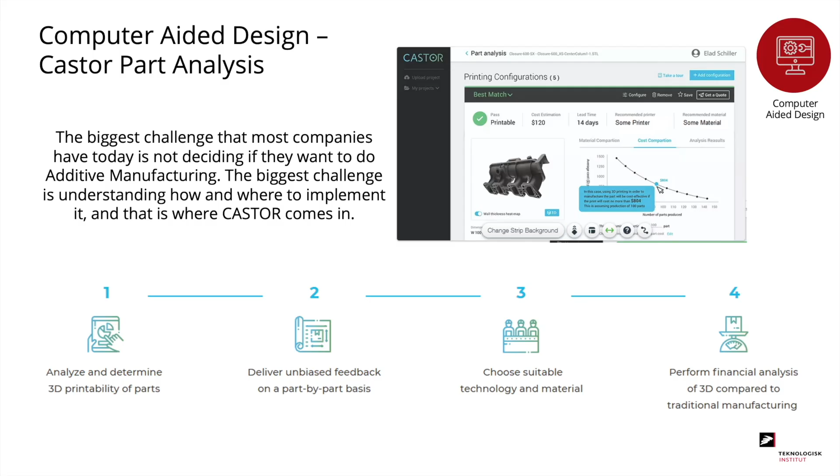Finally, here are some links for the different cases if you want to learn more about why it makes sense to 3D print them.

Hi, my name is Ronnie, and in this module we'll look at a 10-step design guide for additive manufacturing.

The agenda for this video is to first look at why we should design for additive manufacturing. Then we're going to go through a 10-step design guide to achieve the successful design, and finally we're going to round off with a few conclusions.

So why should we design for additive manufacturing? Well, previously with subtractive manufacturing we used to remove material from a block, but now with additive manufacturing we have to add material in order to create something. So there's a shift in the mindset from removing material to adding material.

When moving from subtractive to additive manufacturing, we get the most out of the technology if we actually design for it. In this pyramid, we can see some of the different ways that we can use additive manufacturing. And ideally, we want to be on top of the pyramid where we utilize additive manufacturing to create new products.

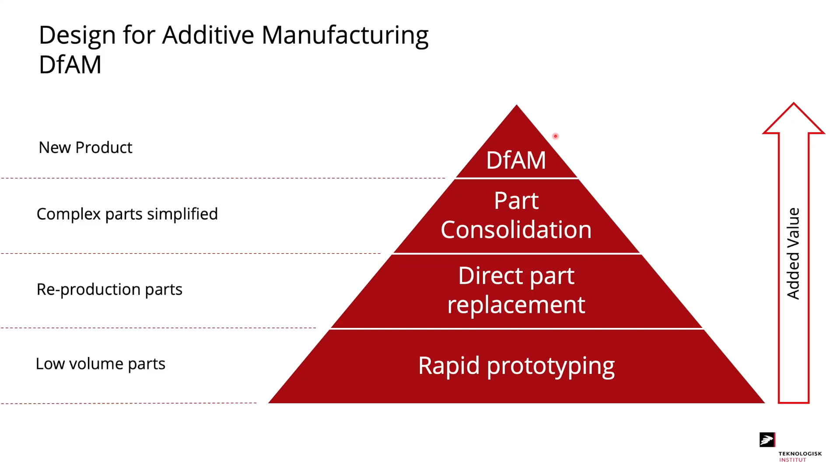So which of the design benefits that we saw before can we actually utilize when redesigning a robot gripper? Well, first of all, we can make it lighter, then we can make part consolidation so we end up with fewer parts in total, and we can integrate the air tubes for the suction cup into the gripper itself.

So to go from the original gripper to a 3D printed gripper, we need to go through 10 design steps. First, we need to choose the material that we want to print in. We have to choose the technology that we want to use. Then we have to define the contact areas and define the print orientation. Then we have to connect the contact areas and add the support structure. Then we have to look at the cross-section area and pay attention to the different design rules. Then we have to validate the design, and finally we are ready to print.

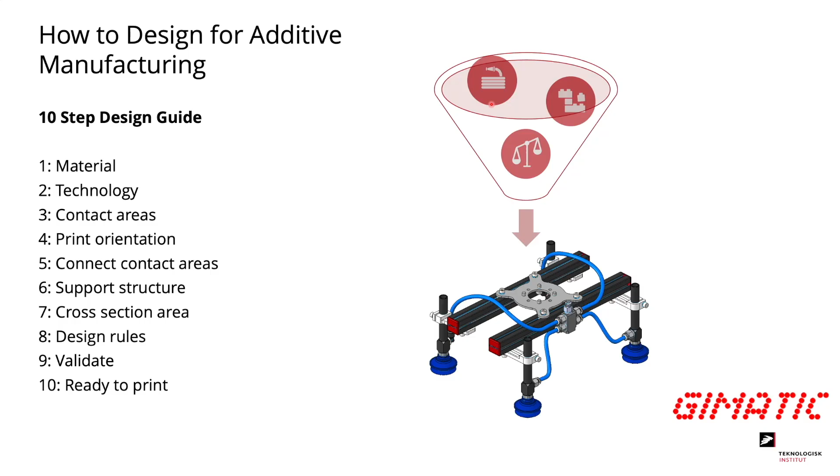When looking at the technologies, we need to clarify what the build volume of this technology is, whether it's sufficient, and whether we need support material or not. What kind of post-processing is needed? What are the tolerances and could they be a challenge? What is the surface quality, and do we have any demands for surface quality? And finally, how can we quality assure our gripper?

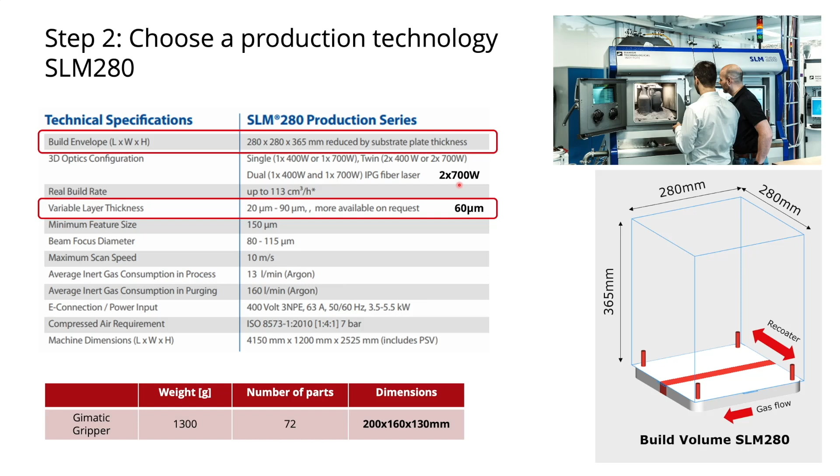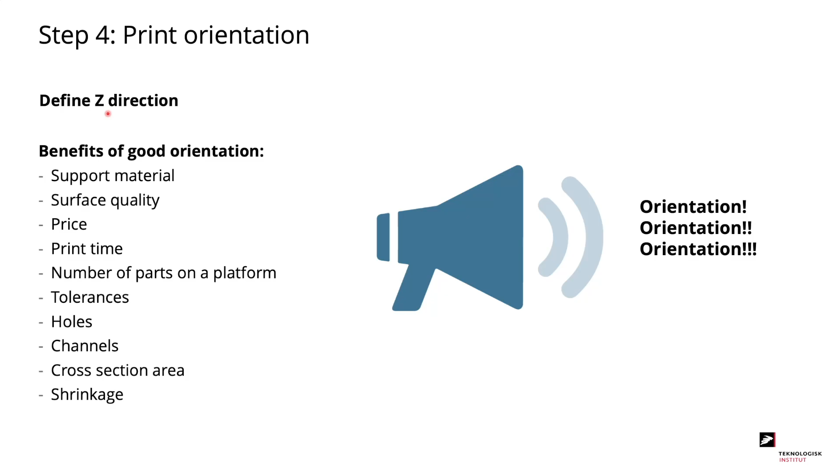Now that we've defined the contact areas, we need to look at the print orientation. The orientation is very important, both because it gives benefits if you have a good orientation, and it impacts your design. When talking about orientation, the vertical direction, also known as the Z direction, is the most important. Some of the benefits of a good orientation could be that you reduce the need for support material, you improve the surface quality, and you get a shorter print time.

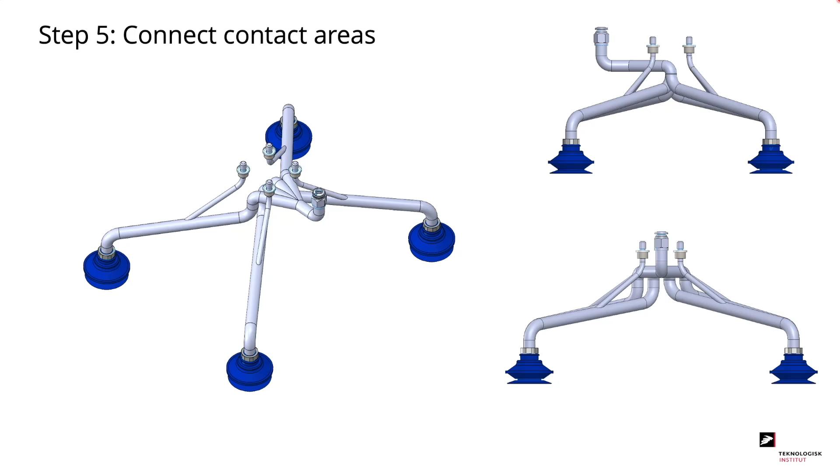Here we've made a sketch of the connection between the different contact areas, and now we can start to add some volume to these areas. It could look something like the drawing we see here, with round tubes connecting the contact areas. And we could actually just print it like this.

But since we're printing with SLM technology, we have to account for support material. So it could be interesting to see whether we could reduce the amount of support material. That's because it gives significant benefits to reduce the support material. For instance, you reduce print time, you reduce support removal time, you reduce the amount of grinding needed to remove support marks, and in turn you get better surface quality.

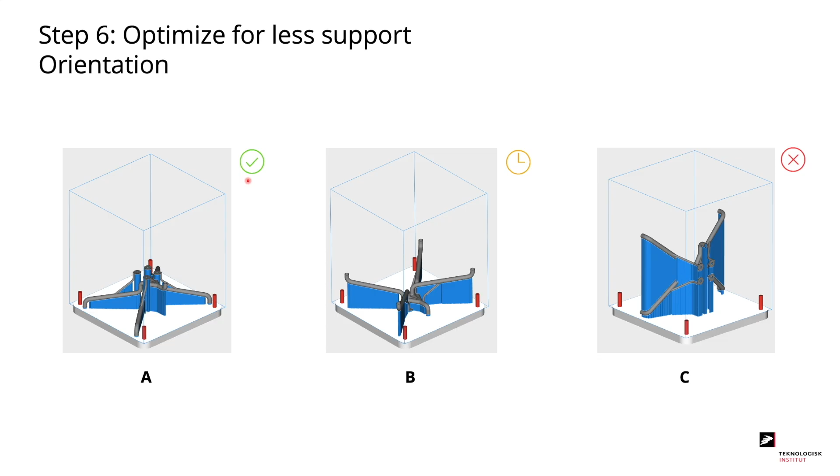In figure C, I've tried placing it vertically because that way we could have more grippers on one platform, so this could be an option if we wanted to series produce it. But I've decided to move forward with figure A because I think that gives us the best orientation.

The next thing we need to look at is the shape of the channels where air will be flowing through. Our channels are designed with a diameter of 10 millimeters, and here we can see that it's not possible to design round channels with a diameter above 8 millimeters without using support inside the channels. So instead, we need to choose one of the other 4 options for shaping our channels.

So we can make it ellipse-shaped, droplet-shaped, diamond-shaped, or shaped like a house. These are the 4 options we have for shaping our channels if we want to avoid support inside them. As we can see to the right, we can also combine these different geometries when designing the channels for 3D printing. I've decided to move forward with the figure in the bottom left corner, where we combine the round geometry with the diamond-shaped geometry.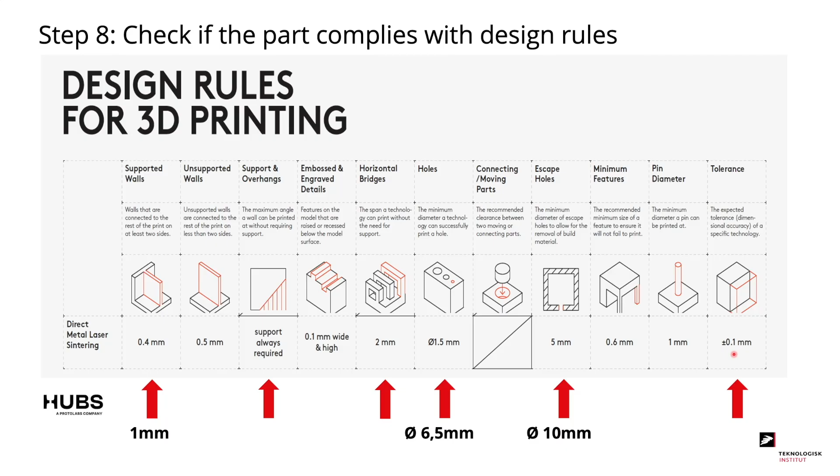The final step before we start printing is to validate our design. We can check that the robot gripper actually fits on the robot, and we can do that in our CAD program. We can also use simulation tools to simulate if the robot gripper is strong enough and if it's possible to optimize it even more. If we look at the robot gripper, I've made an FEA simulation where I used a safety factor of 1.5.

Here we get a maximum stress of 88 for the robot gripper, which is well below the yield stress. We also looked at the displacement when lifting a box of 4 kilos, which this gripper will do. The maximum displacement was 0.3 millimeters, which is acceptable for a gripper of this type.

This indicates that we could optimize our design even more, maybe by reducing the wall thicknesses of our channels from 1 millimeter to 0.4 millimeters.

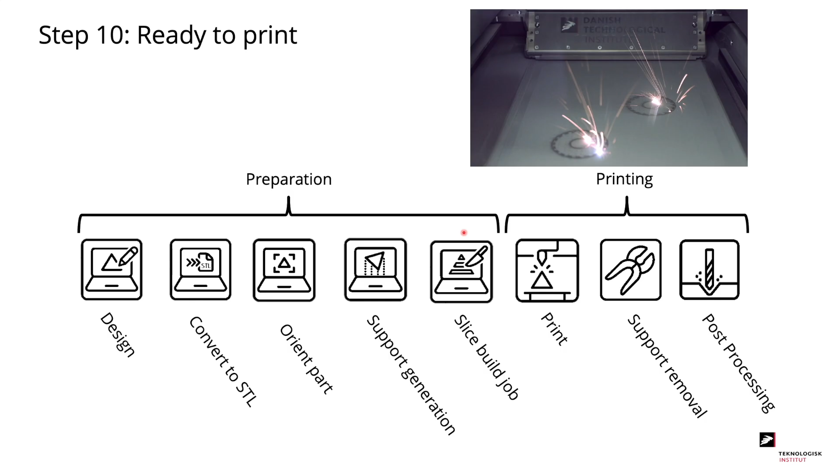Now we're ready to start printing. We've managed the design phase. Now we need to convert our file to a printable file format, then add it to a preparation program where we orient our part the way we designed for. Then we add the support and slice the build job into several layers, which we can then print. Then we start printing, and afterwards we remove the support and take the part through the necessary post-processing steps in order to get a nice surface finish.

What we achieved with this case is that we reduced the number of parts from 72 to only 6 parts. We reduced the weight from 1300 grams to only 150 grams, which is a very big reduction. And finally, we integrated the external air tubes into the gripper itself.

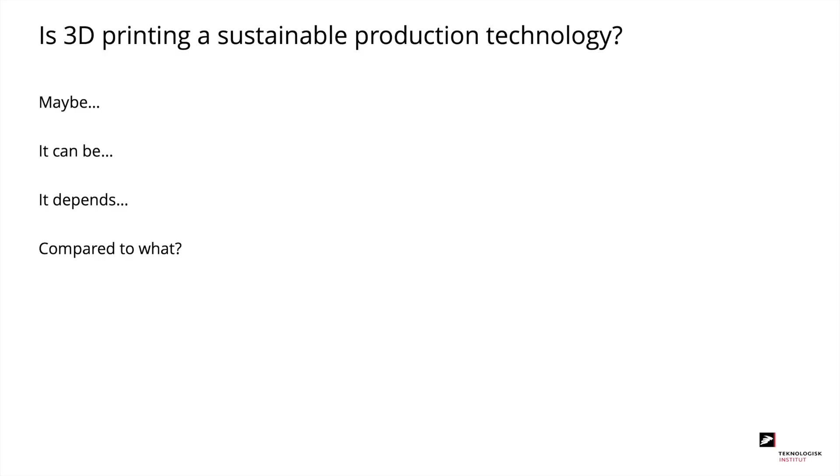In this module, we'll have a look at whether or not additive manufacturing is a sustainable production method. So the first obvious question is: is 3D printing actually a sustainable production technology? The right answer is maybe. Another answer could be it can be, it depends. Compared to what? I can only say that there's a lot of clever people having looked into this. There's been written books about it, there are organizations about it, and many opinions. Anytime you manufacture something, it's not as such sustainable, but this is definitely an enabler for sustainable production. And I will give you some details on that.

One of the frameworks that I actually do like is this one from the article that I have stated here, stating some of the drivers for AM sustainability. You have a number of different enablers, as I will call them, because as such it is not a green sustainable technology, but it enables some of these features.

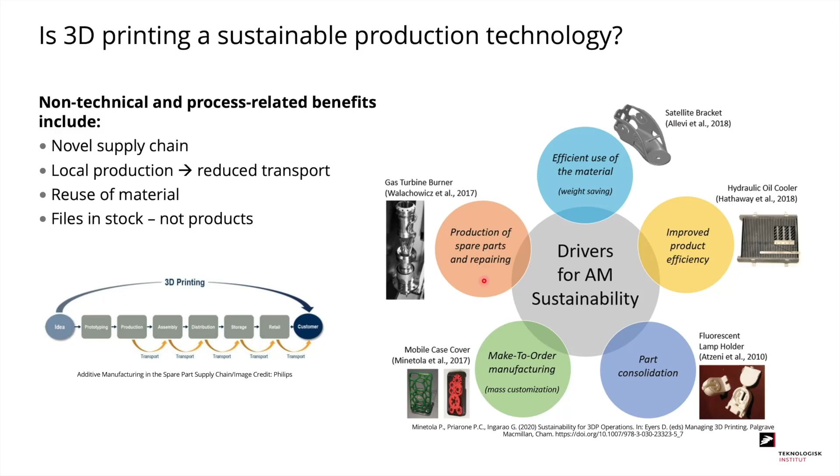Finally, you can have files in stock and not products. This is a really big issue today, because you need to have spare parts for all your equipment to be able to service it really quickly. Some of the features we are looking into is having files on stock instead of products.

Now I have a number of examples showing how others have used additive manufacturing and 3D printing to enable a more sustainable production of the parts.

One of the really traditional cases I have here is from a European project where they optimized some aeronautics components. We all know this belt buckle from an airplane. The traditional one weighed about 155 grams. Using AM and optimization, it could be reduced to 70 grams.

There is a large number of these on a plane, and if you multiply that and see how much fuel is actually used per kilo, you can see that over the airplane's lifetime you save 3.3 million liters of fuel. That is one of the reasons why the automotive and aeronautics industry has really adopted additive manufacturing, because you can make these lighter components, saving a lot of energy, fuel, and money.

The next example I have with you is a case that we did at DTI a number of years ago, together with the Boeing company. It's a bracket, a piece sitting between the chassis and the motor block, so a rather flight-critical part.

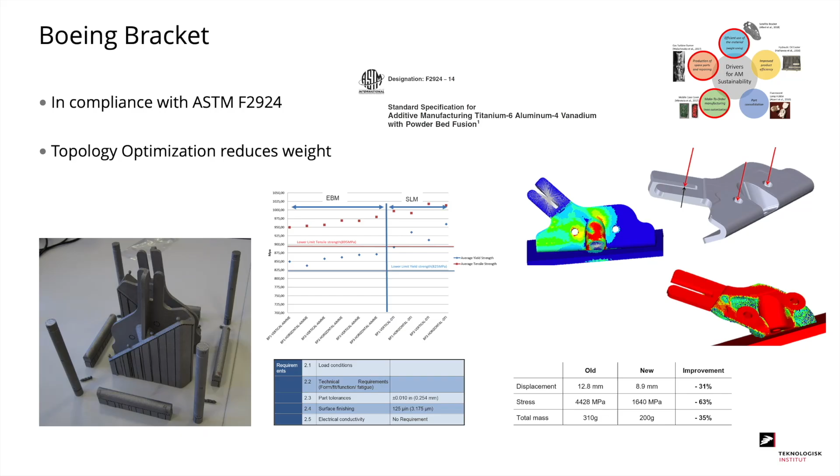The next example is a case that we did at DTI in collaboration with Aarhus University and a company called Thürmer Tools. Thürmer Tools makes these cutting tools. You can see the traditional one here, weighing about 6 kilos.

Again, doing topology optimization, saying what are the forces and removing all the unnecessary material, we went with a design like this, weighing about 1.5 kilos. So again we could reduce the weight quite a lot, and it's important because it's used in places where it's difficult to go, for instance on oil rigs or offshore wind farms, where it's really important to have the parts as light as possible.

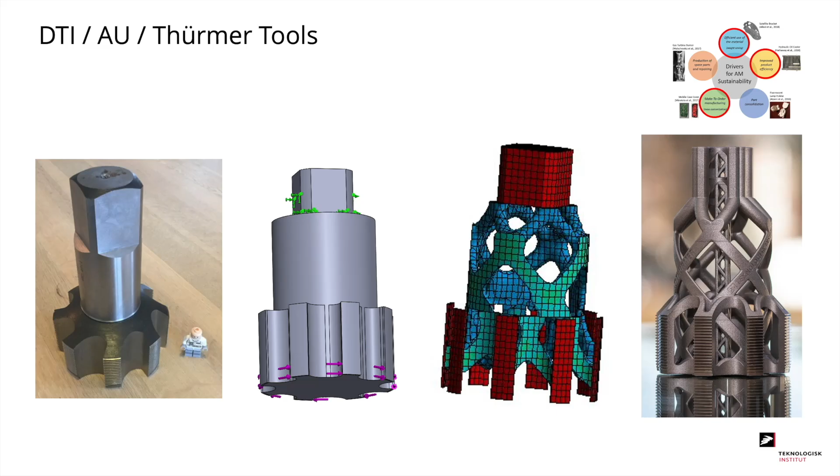Furthermore, when we're talking additive manufacturing, the less material you have, the cheaper it gets, and the faster it is to print. So all in all, very beneficial.

To give you an example where it's not in the aeronautics industry or in the tooling industry, we have one here from consumer goods.

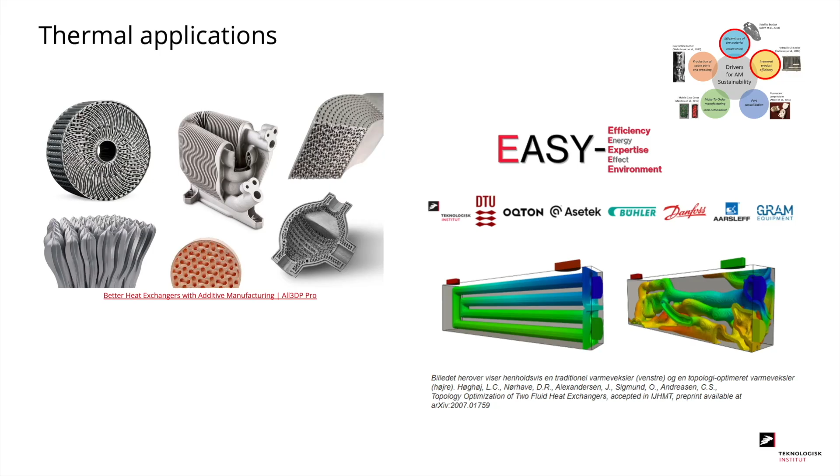At DTI, we have a project called EASY, where we look at thermal topology optimization with these partners. And in this way, you can make the absolutely most topologically thermally optimized parts, saving a lot of energy. So I really do believe this is the future for thermally optimized parts.

Final slide, I just want to round off by naming some of these drivers for AM sustainability. Why is 3D printing an enabler for sustainable production? Because I believe it all boils down to this: 3D printing enables more energy efficient parts and production of lightweight parts. It enables local and distributed production. It provides the ultimate flexibility in your production. It yields a short time to market. It can reduce overproduction, it yields material savings, and it can reduce scrap. All in all, these things enable AM to be a more sustainable production method.

Hi, my name is Henning, and in this video we will talk about the economy of 3D print. We will initially go through traditional cost calculation, then we will look at the business case evaluation, and finally we will give an example of what we have been through.

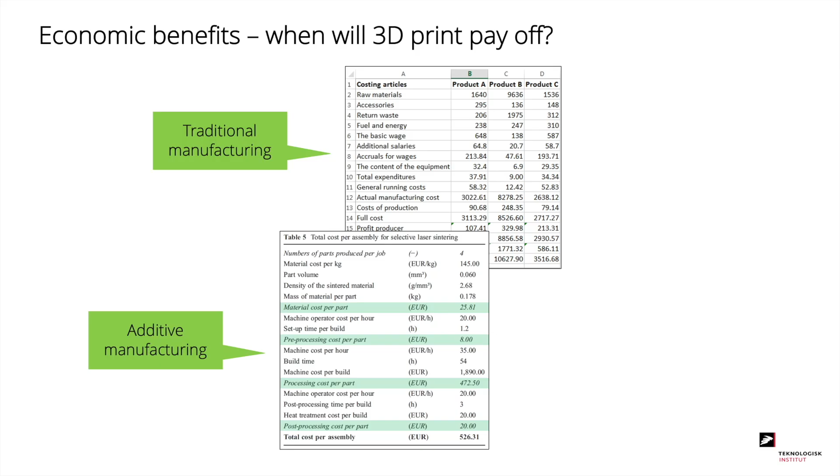First, we look at traditional cost calculation. When you have to choose between different manufacturing methods, you often make a cost calculation to judge between the alternatives you have. Here we show an example of a comparison where on the top we have the calculation for traditional manufacturing with all the cost contributions, and at the bottom we similarly have a calculation for additive manufacturing where the cost elements are highlighted in green.

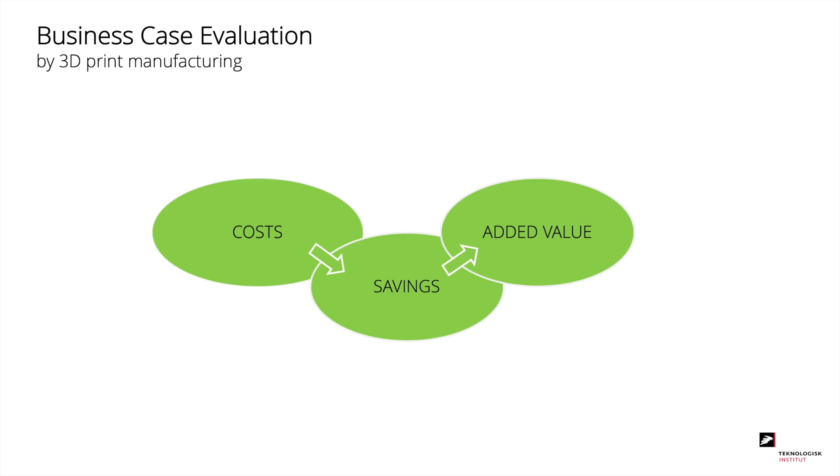To set up a correct business case, you need to look at more than just the costs and savings, and that is what we are going to look at here. So in addition to costs and savings, you need to take into account the added value. To be a bit more specific, we here show some examples of what the cost contributions may be and what the added value elements may be.

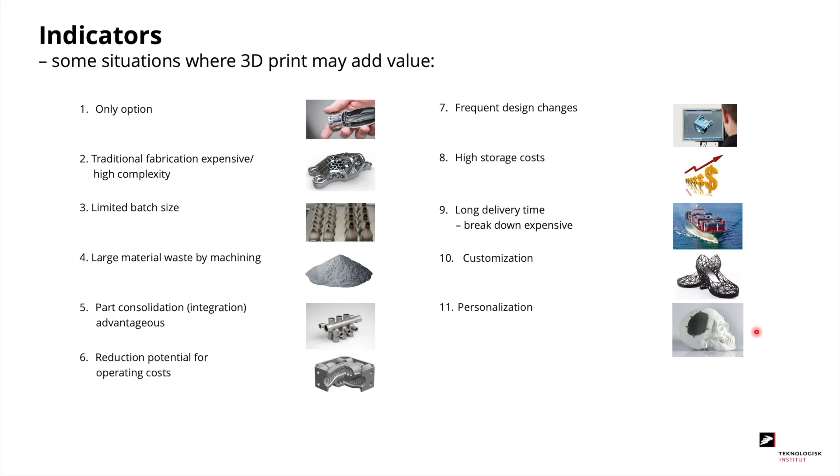The challenge is to reduce the carbon footprint by using 3D print. And how is that done? The solution is to optimize the design for 3D print and produce it in titanium alloy.

What was gained by that? Well, the result was a weight reduction of 55%, from 155 grams to 70 grams. That's not much, you can say, but for an Airbus 380 with 853 seats, it sums up to a total weight reduction of 73.5 kilos.

It has been calculated that over an airplane's lifetime, each kilo contributes to a fuel consumption of 45,000 liters. For the 853 seats, that means the 73.5 kilo weight reduction reduced fuel consumption by 3.3 million liters, corresponding to a saving of 2 million pounds over the airplane's lifetime.